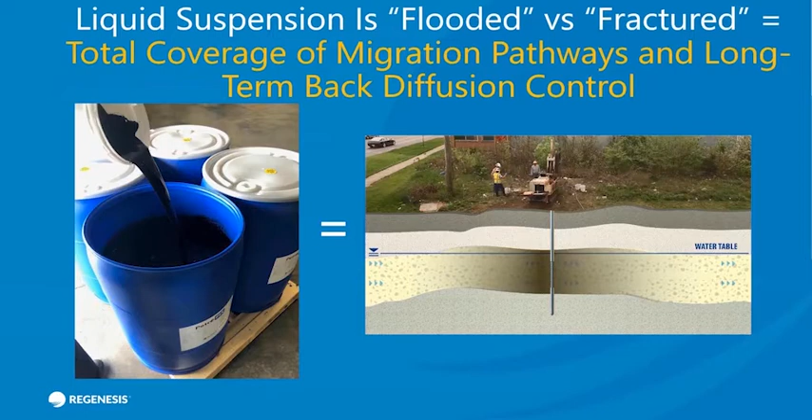So think of these original permeable reactive barriers where you needed to create trenches and physically mix in iron to create this iron wall. Now we're able to cost-effectively apply and inject using methods like direct push, where ultimately we're going to paint the subsurface at these targeted zones with iron and carbon to be able to create something like a PRB.

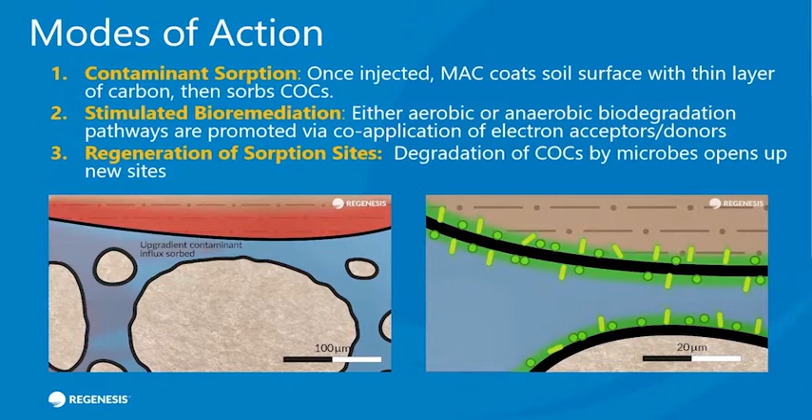So in this slide, we're looking at what we refer to as our mode of action. So initially, the colloidal carbon becomes attached to the soil. And so as the contamination moves through, it's going to sorb. We also typically co-apply an electron donor or electron acceptors to promote biodegradation. And we may also include an ISCR reagent like S-MZVI. And so these reagents are set up to create conditions to enhance degradation.

But in addition, you're going to be able to manage back diffusion. So we have this sorption and degradation that continues, and the sorption sites are freed up in the barrier, and it's maintained over the long term. But we're also able to manage that contamination that may be migrating from finer-grained materials into the more productive areas or more conductive zones. So in essence, we're not going to see rebound because we're able to manage the back diffusion.

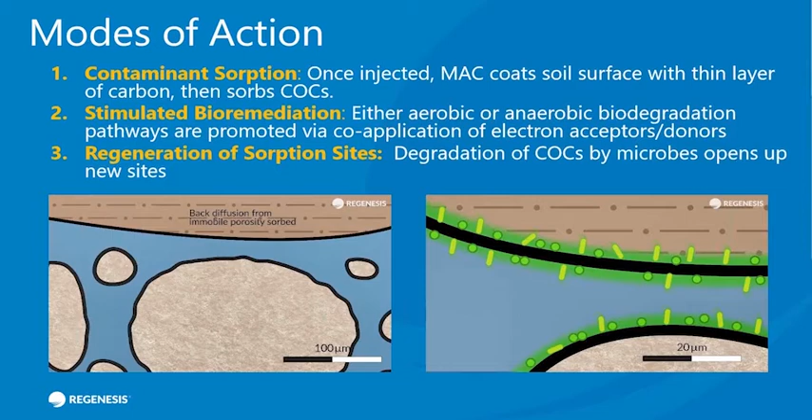So this allows us to achieve and maintain low cleanup standards, which also can mean meeting part per trillion levels with PFAS. There may be no degradation with a PFAS compound, but we're still able to meet sometimes these very low cleanup standards. So some of the key features of utilizing these colloidal materials is, one, they last a long time. It could be years to decades is the sort of treatment time we can be looking at.

We can work with a wide range of contaminants, VOCs, petroleum hydrocarbons, chlorinated benzenes, PFAS, and our results can be very fast. And something else I want to emphasize is an ability to be predictable. We can use models, and we're using isotherms and degradation rates, and that allows a level of predictability. These are environmentally friendly. If you're looking at sustainable sort of applications, this certainly fits the bill. Flexible, we can combine with different technologies, and then ultimately it gives us an ability to reduce liability and save money. So with that, we'll turn it back over to you, Matt.

Thanks, Maureen. Well, last year, WSP and REGENESIS collaborated on this ebook. It's real world business cases where in-situ remediation saved time and money versus pump and treat. There are 3 case studies presented in there. In each case study, there was a brief site background and technical discussion. But the primary focus was on life cycle cost comparisons between in-situ technologies and pump and treat. 2 of the featured sites included in-situ remedies with PlumeStop-based treatment. The other was in-situ chemical oxidation.

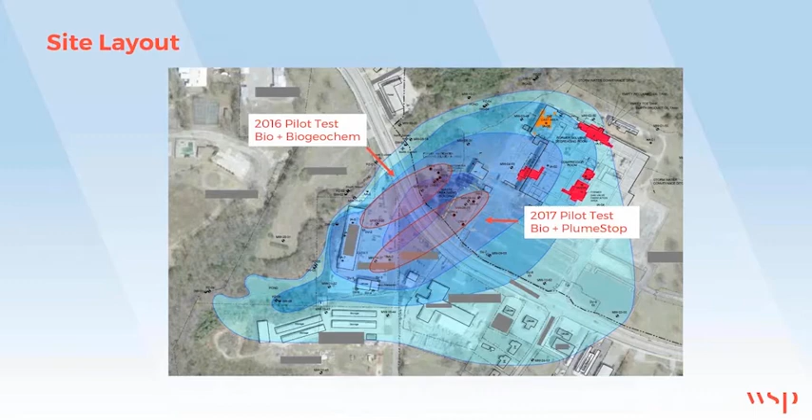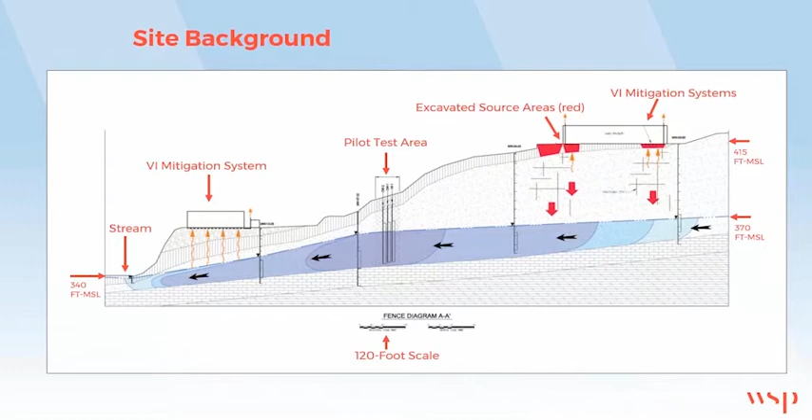So let's get back to the ebook and the life cycle cost comparisons between pump and treat and in-situ treatment. You can see in the left-hand column the cost comparison table. We included pilot test costs in this comparison table. Those were $75,000 for the pump testing that we did there, and $125,000 for the in-situ pilot testing.

Other design components that were included were design and installation, O&M, and monitoring. For the pump and treat scenario, costs included $500,000 for design and installation, $300,000 for O&M, and about $35K a year for monitoring. The 1 year total is about $900,000 for year one. That's capital costs, largely taking up most of that money.

The costs for O&M and monitoring were extended out over a 10-year period of time. This results in a total net present value cost of about $3.4 million, and we discounted this at a rate of 3%. For the in-situ scenario, the costs include $125,000 for the pilot, $1 million for the design and installation of the PlumeStop in-situ remedy, and that same $35,000 again for annual monitoring.

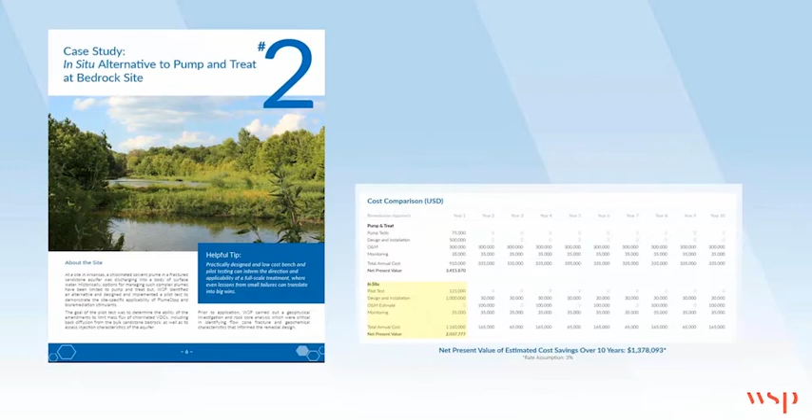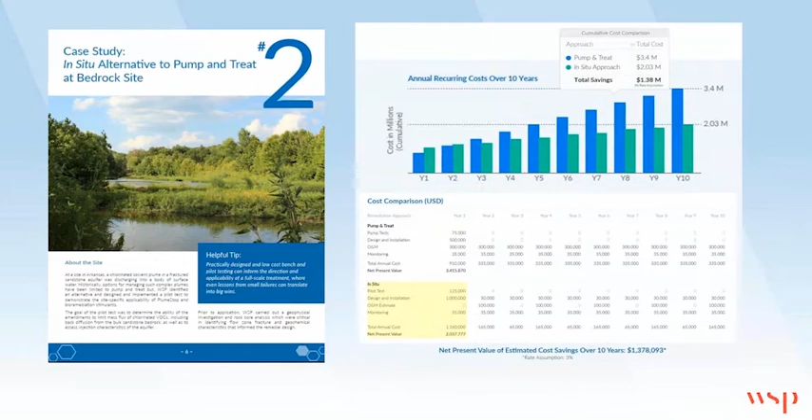Anyhow, the total net present value cost for the in-situ PlumeStop remedy is just over $2 million, a savings of about $1.4 million compared to the pump and treat option over that 10-year lifespan. The graph of the cost shows the data in a more succinct manner. Despite those capital costs being $200,000 greater for in situ than pump and treat, the initial higher costs had a very quick return on investment. The high O&M costs associated with the pump and treat really make in situ a much better financial option.

Now that the data are coming in and this project has been installed, how do you really take a look and do this comparison? One of the things when Matt and I were reviewing some of this data is a question we asked ourselves. You look at degradation, you look at reductions, but really what's the total mass reduction? So we install these colloidal reagents, we do all the things, but at the end of the day, what's their performance and what sort of total mass reduction has been observed? So I think Matt's going to get into some details on that and some interesting information.

Yeah, Maureen, I agree. A side-by-side mass removal comparison between in situ remedies and pump and treat would be important. After all, what good is lower cost if effectiveness isn't comparable? With most technologies, a mass removal assessment isn't even aligned with remediation goals, right? Decreases in the concentration of regulated chemicals with treatment. So basically, what's the difference in the groundwater contaminant concentrations in samples collected at baseline and those collected after treatment?

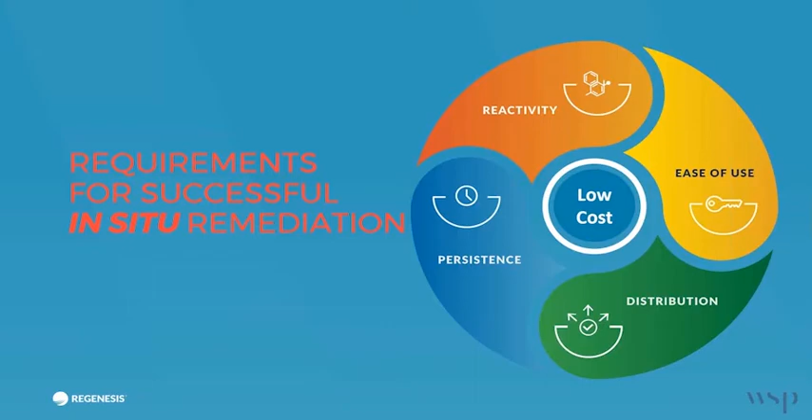But with activated carbon-based remedies, where by design VOCs are removed from the dissolved phase nearly immediately, discerning between sorption and destruction is really critical for making the mass removal assessment. And frankly, I think it's the biggest question I get from regulators when including activated carbon in amendment formulation. So here's a more visual explanation of the sorption mechanism. We'll take a deep dive in how to figure out these mass removal rates.

So, all right, here's a bit of an explanation of how the activated carbon works. So here's a glass of water. That's going to be our aquifer. Let's install a well. And should have added the sand first, but no, that's better.

Add the contaminant, and conveniently, our contaminant is colored red. And treat with PlumeStop, add the PlumeStop, and biostimulants. You can wait a while for the PlumeStop to settle out of solution, as Maureen mentioned above, but it'll associate itself with the soil phase. This could take a month or two. It depends upon the groundwater chemistry of the site.

Whether with time or with a cation application, you end up with an aqueous phase free or nearly free of contaminants by design. This is because the contaminant partitioned to the soil phase, the PlumeStop, which fell out of solution and becomes part of the saturated soils matrix. Hopefully it's degrading too. Why is this important? Why is degradation important on that activated carbon?

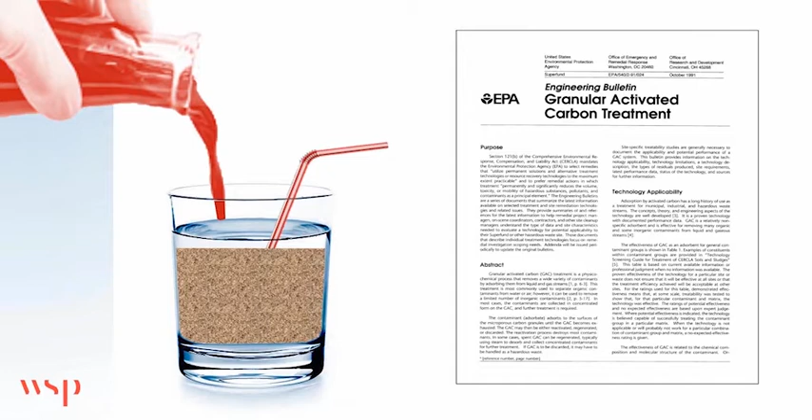Without contaminant destruction, additional contaminant or naturally occurring organics may eventually exceed the sorptive capacity of the activated carbon and potentially bump off contaminant. Here is an older but applicable guidance on granular activated carbon. On the second page, it notes that high levels of background organic matter may result in rapid exhaustion of carbon. It's pretty easy to imagine a scenario with background levels of organic matter even lower than that 10 milligram per liter amount noted in the guidance document here.

When continuously loaded, this amount of organic matter background could cause an issue, potentially leading to desorption of target contaminants into the future. So it's important to have a destructive mechanism included to make sure the remediation is complete and that there are no surprises a couple of years down the road. And of course, complete degradation is the ultimate endpoint to assess the effectiveness of any destructive remediation technology.

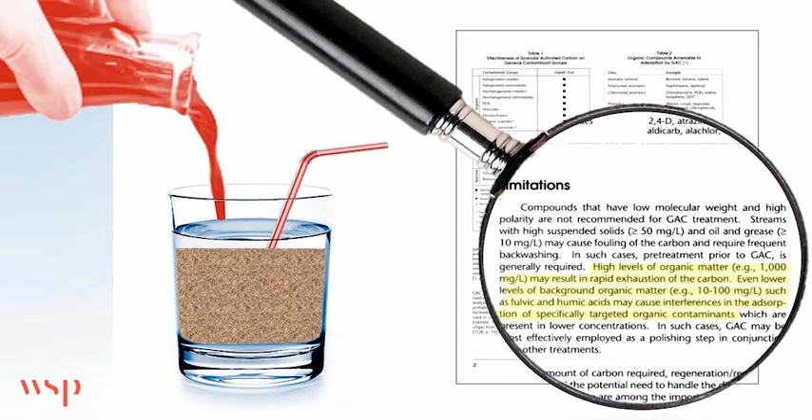In the May 2018 REGENESIS webinar, we took a really deep dive into diagnostics to demonstrate degradation of sorbed contaminants. The webinar compared degradation pathways to taking a trip to an unfamiliar area before GPS. Back then, after every turn, I would look for visual clues, landscape features, and signs that indicate that I'm on the right road. Observing these clues, the diagnostics used along the trip to my destination, right? If I look at these signs and key points, then the consequences of making a wrong turn would never be that significant.

But if I didn't look for these signs and landscape features very frequently and missed something, then I could end up way off course and maybe not even reach my destination. The degradation pathway, or pathways in the case of combined remedies, is the remediation roadmap. The specific reactants, products, intermediates, nutrients, catalysts, etc., all end up in this equation. And they all vary, of course, by the contaminant being treated and the pathways that you're trying to stimulate.

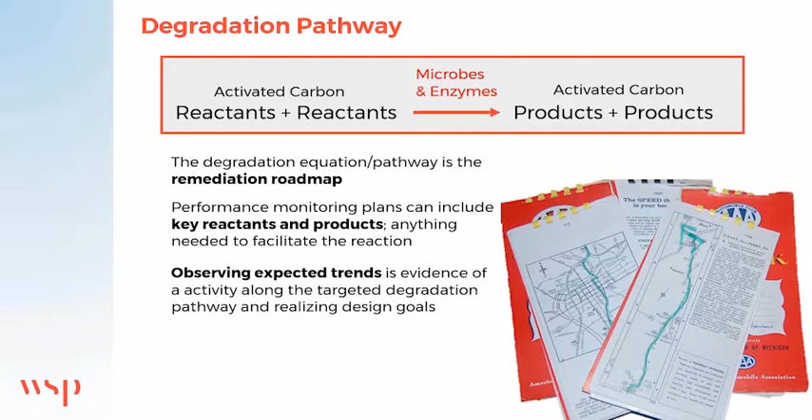For assessing mass removal, though, if that's what we're focusing on, you can just look at the direct evidence of degradation: contaminant concentrations decrease and end product accumulation. Isotopic data can also be used to estimate mass removal, but I don't typically use isotopic data that way. I use it more qualitatively. It answers a simple question: is it degrading or not?

I don't typically try to correlate appropriate enrichment studies to field conditions and tease out mass removal, but that can be done. As I'll be showing in the examples today, there are a couple of ways to get around some sorbed mass issues using really simple methods and not having to rely upon some of the more advanced diagnostics. But first, Maureen's going to tee up the discussion with a case study.

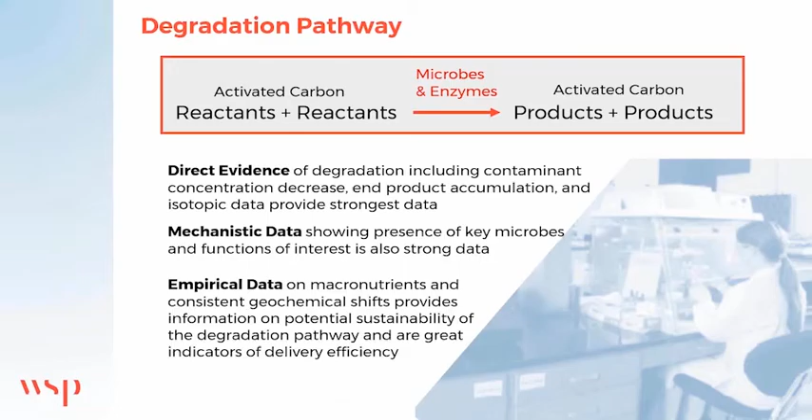Oh, thanks, Matt. So, this question, do we have biodegradation? We're dealing with a colloidal carbon, it's sorbed, and we consistently get this: how do I know things are degrading? So I just want to give an example here, and also just refer back, we have a lot of proof of concept lab studies that have been conducted looking at this question, and you can go to our tech bulletins on our website, but I wanted to get into this direct evidence.

So here's an example of a barrier that was installed where we have PlumeStop, S-MZVI. We also have HRC to promote reductive dechlorination along with some microbes. We have a well within the barrier area, and then there's wells that are down gradient of the barrier. Next slide, please.

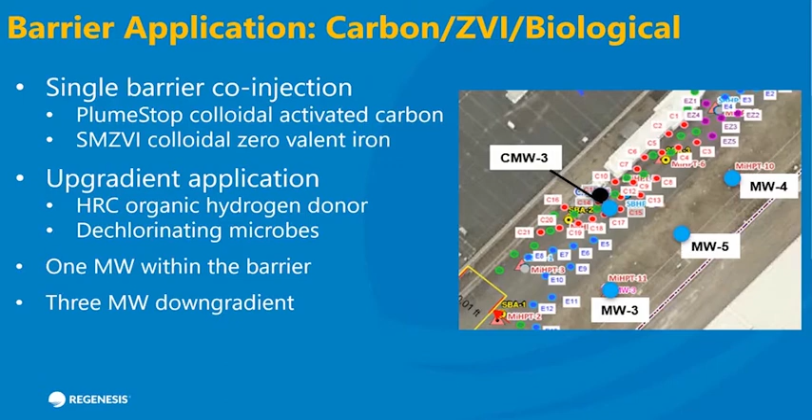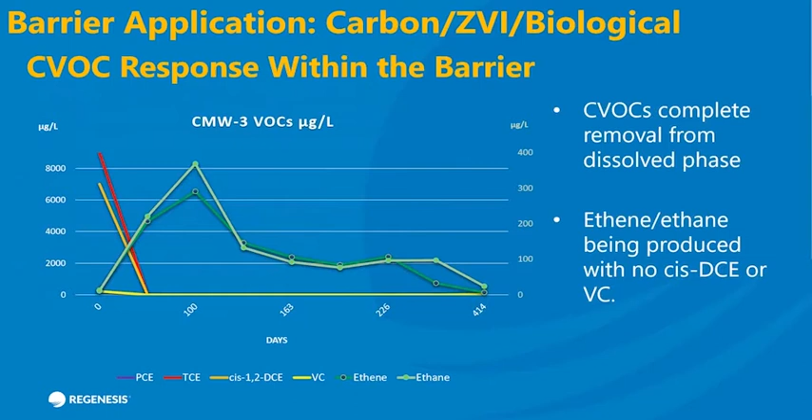So in the results, what we see is a very rapid reduction of the PCE and TCE. Now that's something we certainly would expect with the colloidal activated carbon, but we very immediately saw an increase in formation of ethene and ethane. So this is really the ultimate direct evidence that you would be able to obtain and show that you're getting degradation. And interestingly enough, we had really no cis or vinyl chloride that was generated. And again, this is the well that's within the barrier itself. So next slide, please.

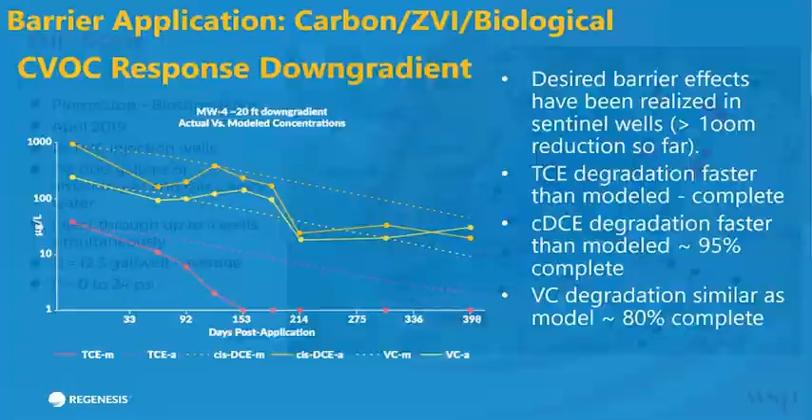Thanks, Maureen. So Maureen just showed a great example of showing that degradation is happening, and you can't argue that degradation is not going on in the presence of ethane and ethene in that system, but it doesn't do a complete mass balance so that you can know how much has been destroyed. So that's what we're going to focus on for the balance of this talk. So let's get back to this Arkansas site. So we went beyond the pilot test, and we performed a full-scale PlumeStop plus bioremediation treatment in April of 2019.

Unlike the case study that Maureen just presented, ZVI was not included in the formulation. We injected through 26 PVC wells, shown in purple on the map to the right. In total, nearly 200,000 gallons of amendment and mixed water were injected at an average flow rate of about 12 GPM per well. We got through the injections relatively quickly by using a manifold to simultaneously inject up to 4 wells at a time. There were really no surprises during application.

The application was really consistent with the design parameters identified during the pilot testing. And we also had some great crews out there performing the work.

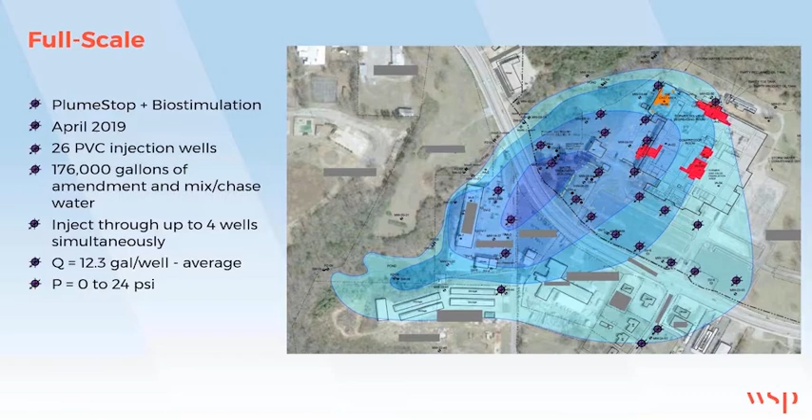So the goal of the remediation was to limit the transport of the VOCs and promote biodegradation. Here's a very simple degradation pathway for TCE, the contaminant of concern at the Arkansas site. It's our roadmap, and I'm sure you've all seen this before. There is no mention of the Dehalococcoides, pH constraints, cobalamin lower ligand requirements, et cetera, in this simplified roadmap. Those milestones are included in those other webinars.

But it is detailed enough to depict what happens to aqueous phase concentrations of TCE and its hydrogenolysis degradation products when you end up treating these with activated carbon-based amendments. TCE has a great activated carbon isotherm. It sorbs to the activated carbon, which is associated with the solid phase, as Maureen has discussed, and is removed from the groundwater. So groundwater samples won't have much TCE in it.

DCE has an okay isotherm. Some of it will sorb and some will remain in groundwater. Vinyl chloride has a poor isotherm. Typically not much of it sorbs, and most of it is in the groundwater. Ethene doesn't partition appreciably to the activated carbon. Just about all of it remains in the groundwater.

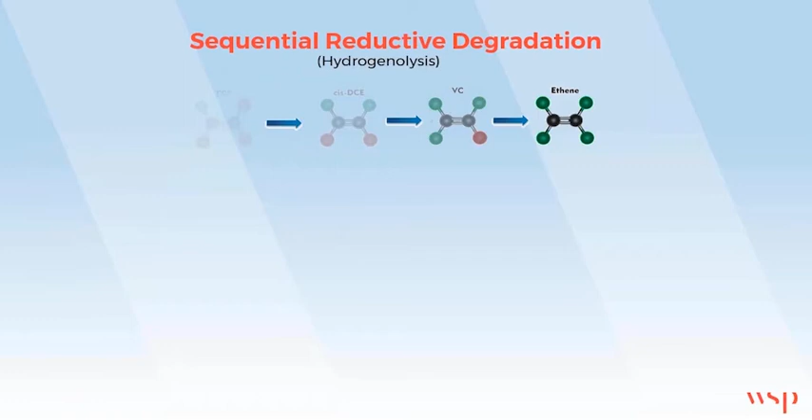There's probably more generated than you're actually quantifying, because aerobic processes, even though they're not very active, will lower the concentration of ethene compared to what you're measuring. But there's no harm in being a little bit conservative. So here are the results for the Batesville site.

The average ethene concentration from all site wells measured in the year 1 post-treatment groundwater samples was about 190 micrograms per liter, or 6.8 micromolar. Extrapolated across the entire groundwater volume, the entire plume, after 1 year, that's about 1,700 moles of ethene produced. This is equivalent to about 500 pounds of TCE that was destroyed by the treatment.

This is pretty good when considering the sequential nature of the degradation pathway. It takes time to progress to the phase when ethene is the most abundant daughter product being produced along the degradation pathway.

For the pump and treat comparison, a hydraulic barrier got some serious consideration for implementation at the Arkansas site. We collected the data needed to design it, including substantial pump testing activities, where we were able to gather key design criteria and quantify those for design purposes.

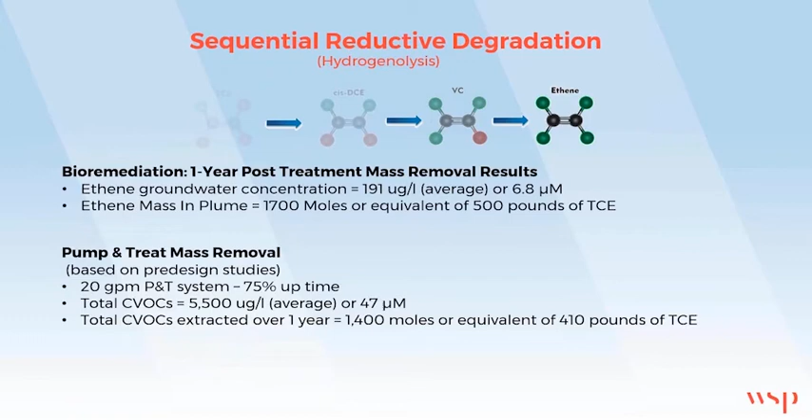So here's the year 1 mass removal comparison. Equivalent of about 500 pounds of TCE removed for the in-situ remediation versus 410 pounds for the pump and treat. Basically the same or close enough. So equivalent mass removals between the technologies.

But, before I ran these calculations, I thought for sure that pump and treat would outperform in-situ during the first year. This is because of the sequential nature of the degradation, the time microbes take to reduce TCE to DCE and DCE to vinyl chloride, before getting to the serious ethene production phase of the sequence.

So, okay, in summary, at this site, mass removal performances were similar, but the costs were not. The in-situ option saves about $1.5 million over 10 years as compared to the pump and treat alternative.

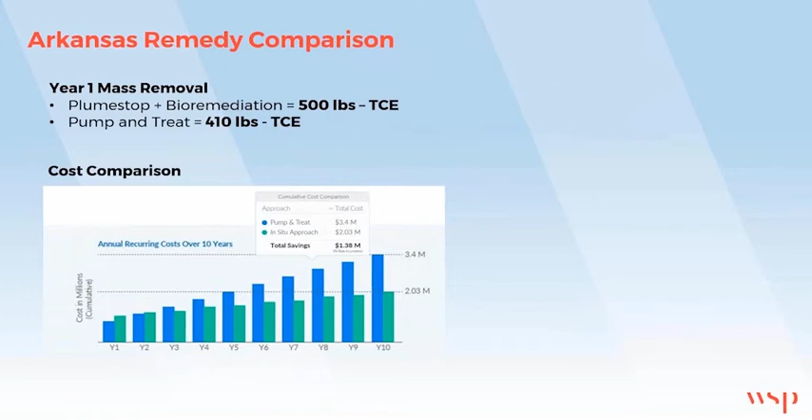Our decision to implement an in-situ remedy at the Arkansas site over a pump and treat remedy is looking pretty good at this point, and we're going to be able to realize those savings with at least a comparable performance between the in-situ treatment and the pump and treat. So the value is there for the in-situ remedy.

So on to another site. I like to add iron, and Maureen does too, as she showed in her presentation. I like to add it as either ZVI or as biogenic ferrous sulfide, like the pilot test we completed initially at that Arkansas site. Both of these, the ZVI or iron sulfides, stimulate that abiotic pathway, or beta elimination is what you probably commonly hear.

Lots of technical reasons that I've spoken about at length during some of these previous webinars for combining bio. They're very complementary pathways. And I've found that with these pathways, 1 + 1 equals more than 2. But quantifying mass removal becomes a bit more difficult with these amendments.

With TCE being sorbed to the activated carbon, that's a confounding factor, but also there's poor product recovery associated with using these elimination stimulating pathways. But there is a relatively easy way to calculate mass removal with activated carbon plus biostimulation plus beta elimination pathway stimulation.

Perform a saturated soil mass balance with time. That's a great way of figuring out direct comparisons of how much contaminant has been destroyed. Don't just look at the aqueous phase, look at the saturated soil phase. It's the CVOCs in groundwater plus the CVOCs in soil. What happens with those with time?

To do this, in addition to collecting groundwater samples, saturated soil samples will also need to be collected. The soil data will need to be adjusted by subtracting out the amount of VOCs attributable to the aqueous phase, the VOCs that are in the groundwater. Determining the CVOC contribution to soil moisture is done simply by multiplying the percent moisture of the saturated soil by the groundwater results from an adjacent well, and then just pull it out of there.

After the adjustment for soil, an adjustment for soil bulk density needs to be made too. I like to keep it simple and multiply by the dry bulk density of a cubic meter of soil, about 1,600 kilograms. With the soil VOC content defined, all that's left is back in groundwater. So what's the concentration? How much groundwater VOC contribution needs to be put into the unit volume of aquifer material? And in my examples, I like to use the cubic meter again.

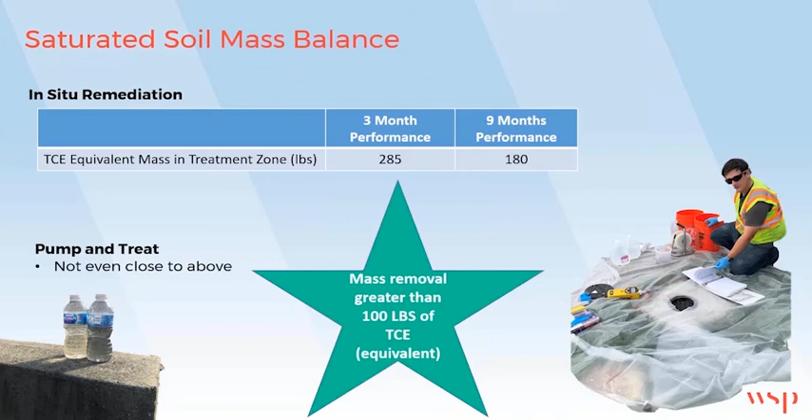So this site also shows the cost and performance, the value of the in situ alternative over the pump and treat alternative. So with that, I think we can hit a couple of conclusions. And Maureen, want to kick us off?

Sure. I think, again, just reiterating some of the comments I had made before, that when working with PlumeStop and some of the associated reagents, we can create a barrier or treatment system that lasts a long time, can be fast. Now we know the types of mass removals we can achieve. And ultimately we're looking at an effective technology at much lower costs.

It was generally comparable. So the rates that you can expect from a properly designed pump and treat system might be fairly equivalent to the in situ remedy rates of mass removal, at least initially over that first year. But the operation and maintenance costs of in situ remedies are much less than those for pump and treat. So the in situ remedies provide huge savings and value over pump and treat systems.

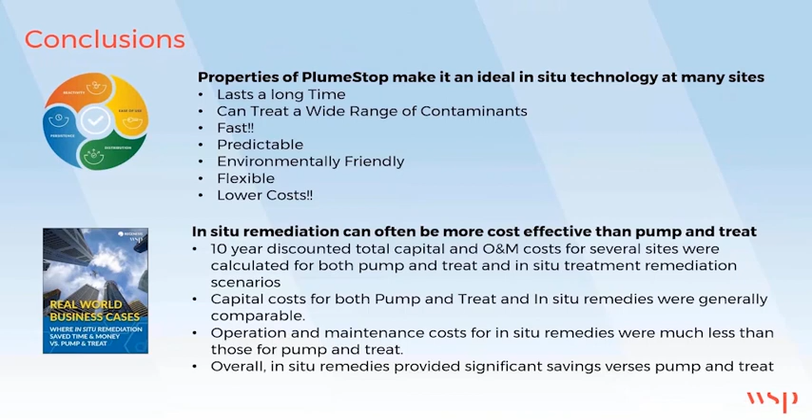And mass removal can be estimated for both pump and treat and in situ treatment scenarios. In those confounding factors, the partitioning caused by the activated carbon and low product recovery caused by these different beta elimination pathways that don't yield compounds like ethene, or at least not as much, you can get over those. So the utility of doing these aquifer volume-based mass removal estimates is really great,

and those constraints are easy to overcome. So comparative mass removal assessments have shown that at these subject sites, the mass removal associated with the in situ remediation is equivalent to or better than that of pump and treat, at least over the periods that we looked at. And I actually expect that the efficiency will continue because pump and treat is going to tail off a little bit as they start reaching asymptotic levels, whereas the in situ has a better ability to penetrate and diffuse into matrices that are a little bit tougher to deliver to initially, and you can get degradation actively happening there as well.